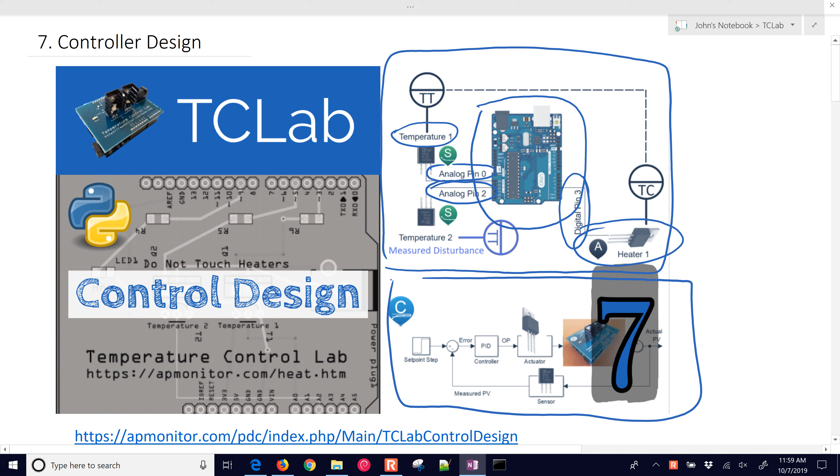So let's go ahead and just get started by reading the objective. We want to design a controller for the TCLab with a process diagram and feedback control block diagram.

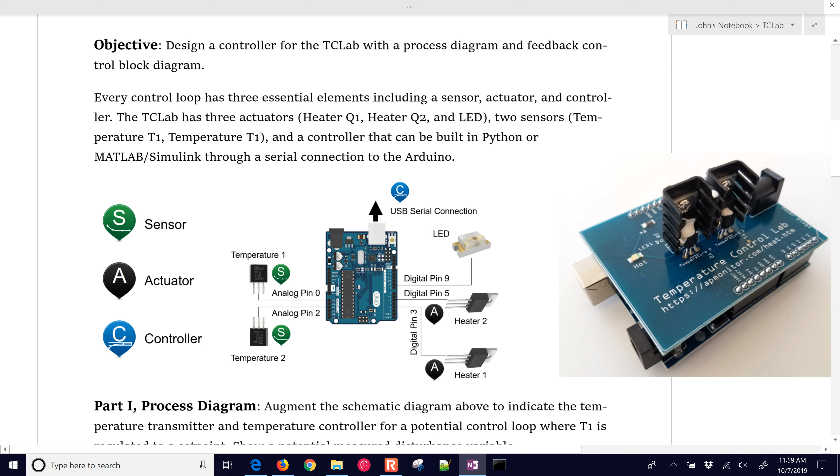Okay, we have this diagram of our sensors and actuators. Let me just go ahead and indicate here on the right where those are actually located. So you have a heater that's right here. It's a transistor heater, and this is for temperature 1 right here. So we're just going to be doing the one on the right hand side, and then right below it, that is our temperature sensor.

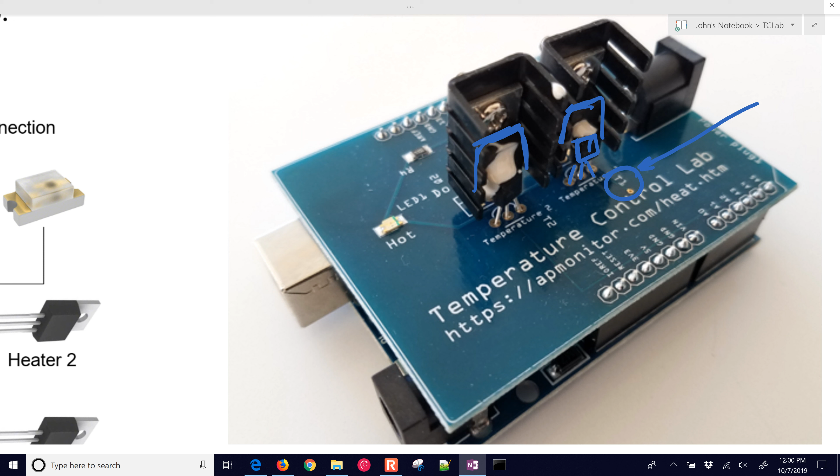There's 3 prongs for that one that hold up. It's a very small thermistor that's attached to the transistor heater. Okay, so those are our actuator, which is the heater, and the temperature sensor, which measures our current temperature in degrees Celsius. Okay, here's the overall diagram. What we're going to do is indicate what is our temperature transmitter.

In this case, this signal right here is our temperature transmitter. And then our temperature controller is going to be here as well. Just do a dotted line for that to the temperature controller, and then the output of that is then going to go to heater 1. Okay, so here's our diagram that shows the transmitter and the controller.

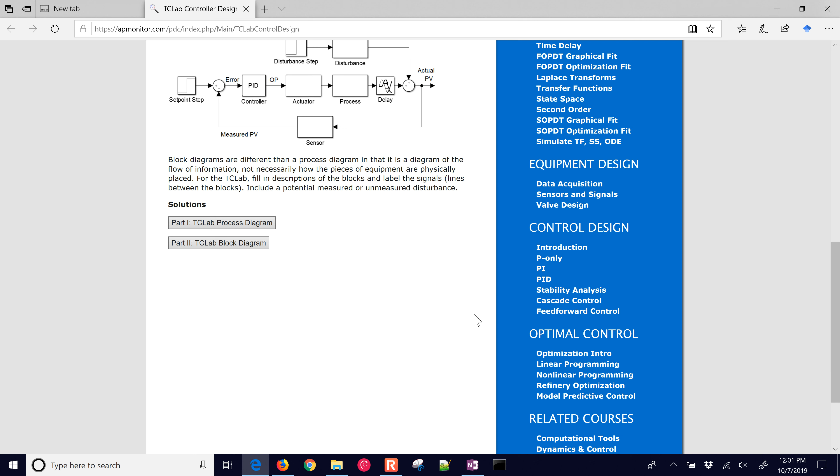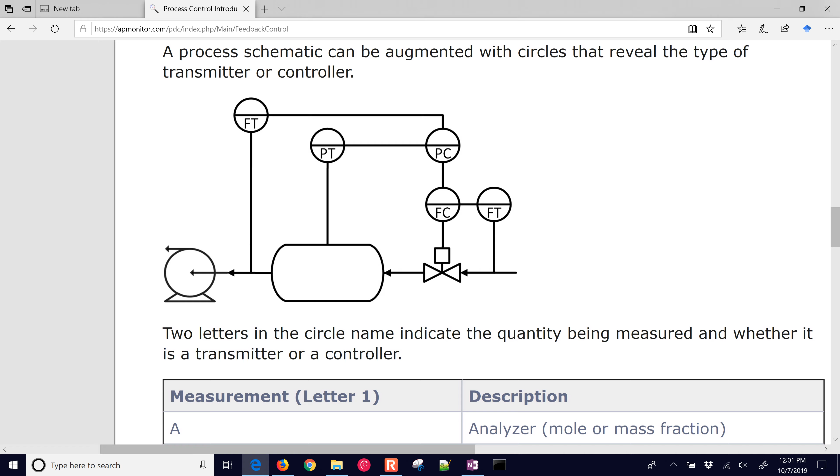Now, if you have other things, you can also indicate those. The first letter is the thing that we're trying to measure or control. So if we come to the controller design, and then here on the right, introduction, it'll show you a list of those symbols that you can use. These are typical diagrams that show the transmitters and controllers, and here you can see the letters. In our case, the measurement is a temperature, so it's going to be T.

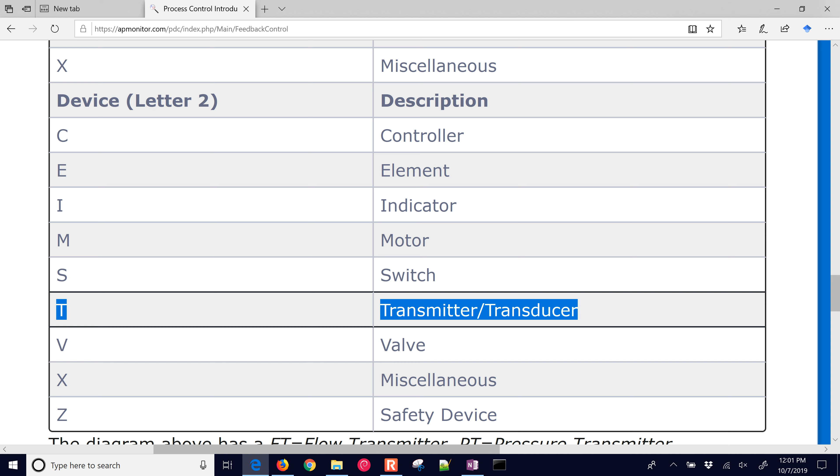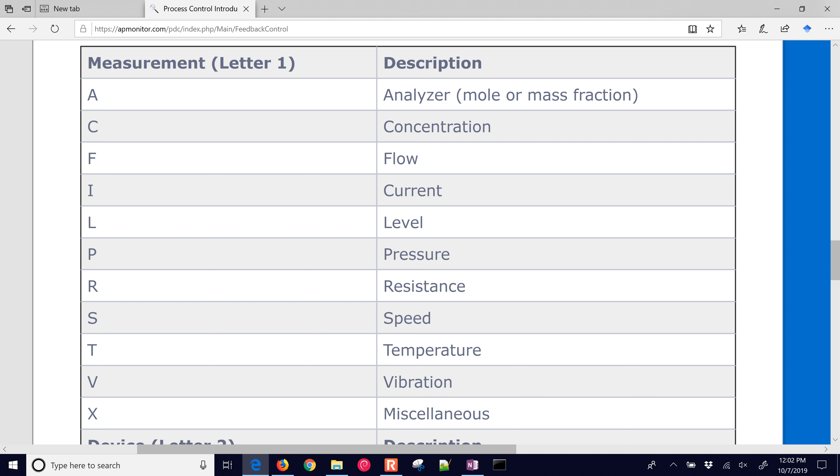And then we commonly have, for example, controllers or transmitters or transducers. Okay, so those are the letters. The second letter is the type of equipment that it is. And the first letter is the quantity, like the measurement or the type of controller. It's the quantity that we're going to be controlling or transmitting. Okay, so if I come back to this diagram, that's why I have the 2 letters there. The first one stands for temperature, and the second one is transmitter.

And often what they'll do is do a circle and then maybe a TT, and then you could have something like 102. So it's temperature transmitter 102 if you have a lot of them on the diagram, and this would be a temperature controller, typically same number. Okay, so there's our diagram. The dotted line often means a signal. Just to differentiate, if you have flow loops or things like that, you can see a dotted line to indicate that it's a number or a signal that's being transmitted.

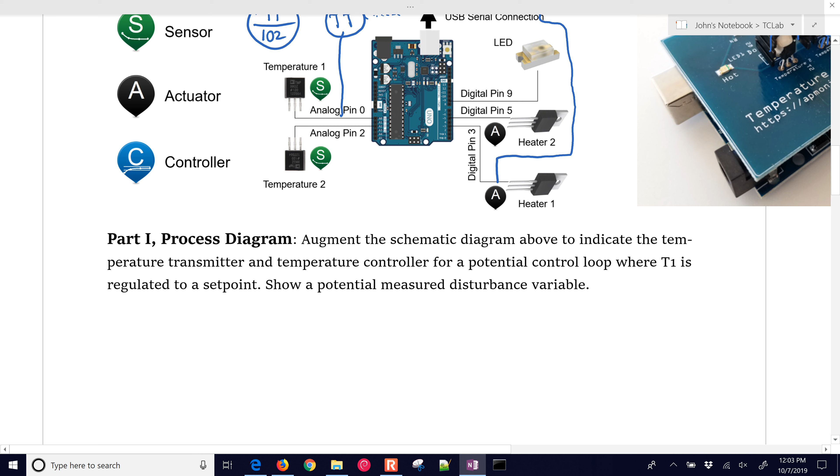Okay, so let's go on to the second part of this question. After we've done the temperature transmitter and controller, we want to do a block diagram now. And as opposed to a process flow diagram or a P&ID, a process and instrumentation diagram, we are going to be doing a block diagram, and this shows the flow of information, especially for control loops. And so what we're going to do in this case is indicate not only the blocks but also the signals between them. What are the signals and what are the individual blocks that make up this block diagram?

So first of all, we have here on the left our set point, and that is a set point for temperature 1. That's our desired target value. And then we also have a process variable, and that is the measured temperature 1. It's going to be coming from the sensor. In that case, it's the three-pronged little thermistor. Okay, and we're going to be reading that.

The thing that it reads is it takes the actual temperature, and so this is going to be in degrees C, and it's going to convert it into a millivolt signal, which then will transmit into a temperature. So this one's in millivolts, this one's in degrees C, and the sensor transmits something from the physical units into something that's a signal that can be then processed, maybe converted into a number.

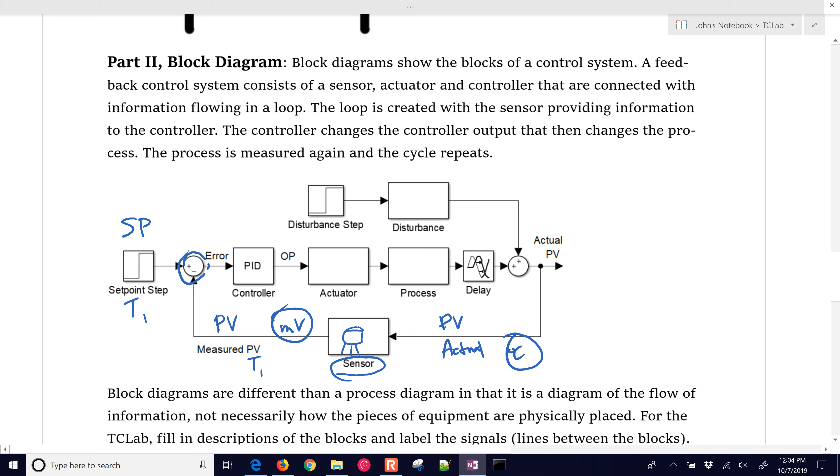Okay, we're going to compare these two. This little addition thing has a plus sign and a minus sign, meaning that the error is just going to be the set point minus the PV value. So that just simply indicates that we're subtracting one from the other, and then that becomes our error between the two. It's going to come into a controller, such as a PID controller, and then we're going to produce an output, a recommended output for the actuator.

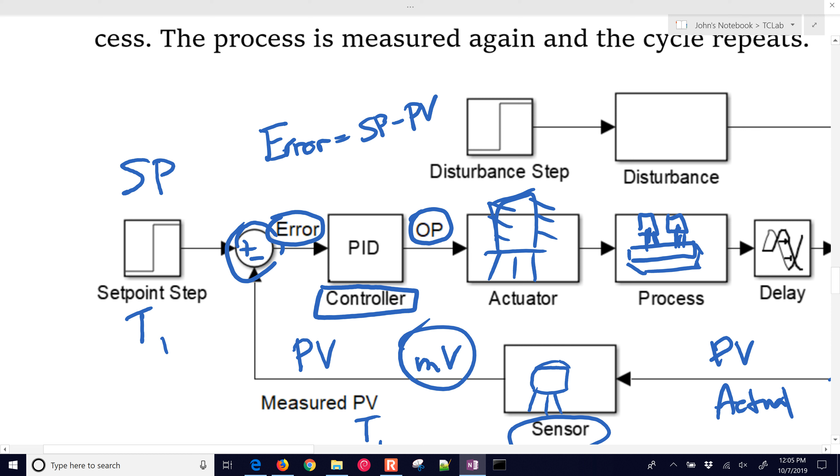In this case, the actuator is the heater. It also has the 3 prongs. It's a little bit bigger, but it has the finned heatsink that it's attached to, and that is our actuator. And then our process is the actual TCLab with the heaters and temperature sensors, and so we put in a different actuator value, and then out comes, after some delay here, the temperature that the heater had caused. Okay, so that's the temperature 1 that the heater actuator had produced.

Then there might be disturbances as well. Some of those disturbances might be from things like ambient temperature. It might be from temperature 2 if we turn on heater 2. And so the ambient temperature, or temperature 2, is going to affect the other temperature sensor here, and then that is going to be the temperature 1 addition from the disturbance.

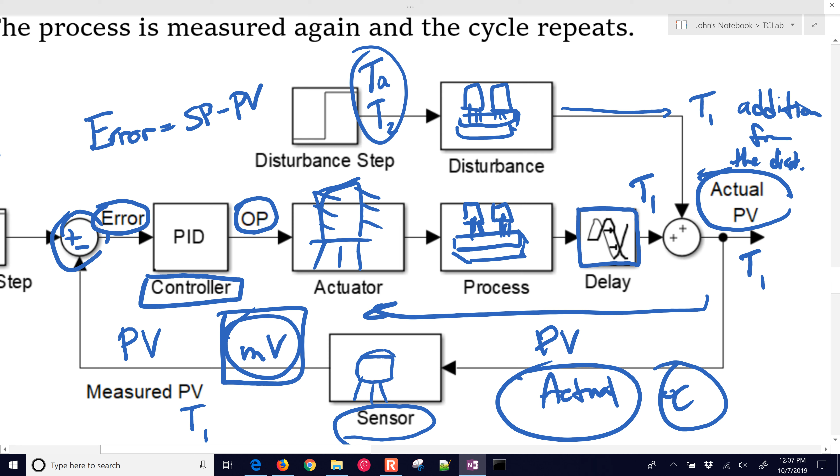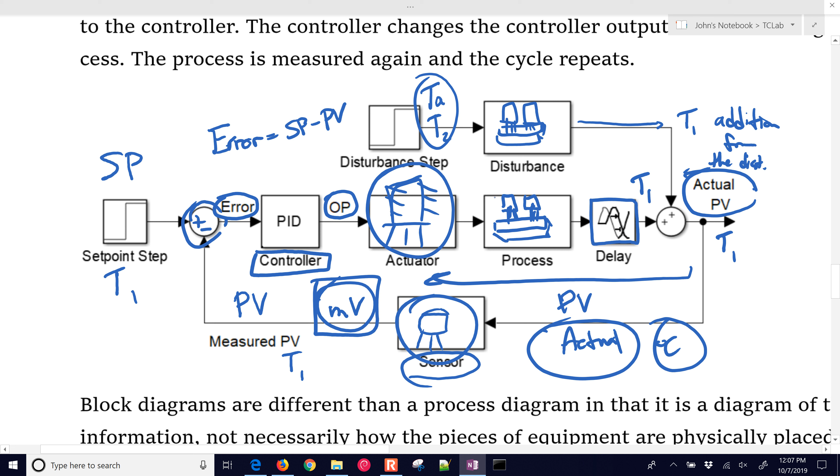Okay, and then we're going to add those two changes together, and that's going to give us our actual PV, our temperature 1. That's not our measured value, but our actual in degrees Celsius. And that's going to then convert into a millivolt signal, and then we go around that loop again. Okay, so here is our diagram where we've put in the sensor, the actuator, and the process, and then identified some of the potential disturbances.

Okay, so just to compare with the solutions that I put there, the one thing you might want to do is just add in the disturbance, like an ambient temperature that might be measured or unmeasured. Temperature 2 is likely going to be measured, and ambient is not going to be directly measured, so it's going to be an unmeasured disturbance. Okay, so that is our controller design.

Again, the very first step of implementing a controller is just to identify what is going to be the sensor, the actuator, and the controller, and then you put those together in a process and instrumentation diagram, or you can do it in a block diagram form, like we did below. So both of those are very helpful in seeing the flow of information or where the instruments are attached to the process.

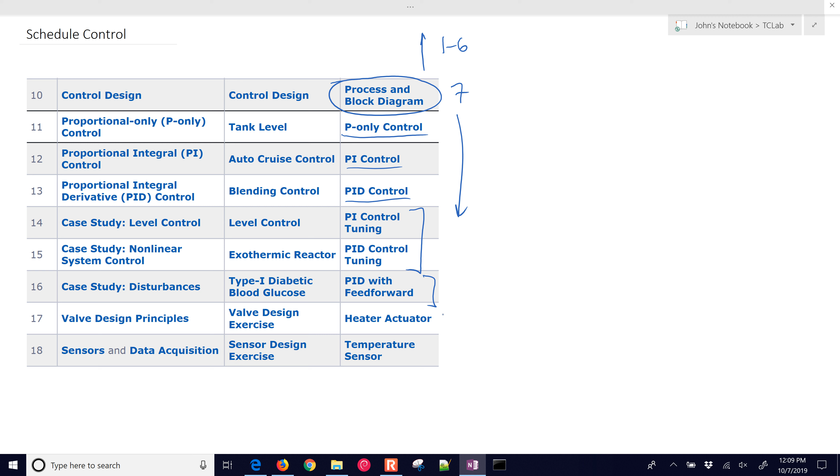For our next up on this, I'll give you a quick overview of where we're going with the controller design. We did the modeling previous to this. That was 1 through 6, and then we have 7 on down. This is our process and block diagram. We have P-only control up next, PI control, and then PID, and then we're going to do some tuning, add a feed forward, take a look at the actuator and the sensor. So that all goes into designing a controller and some of the theory and applications behind developing a PID controller and tuning it.